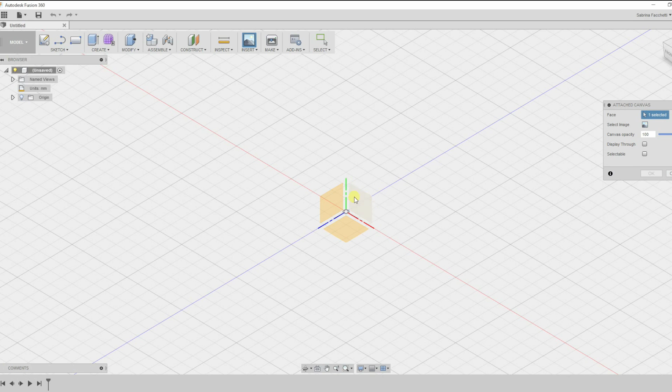Step 1. The first step is to import the image of the sunglasses. We select Insert in the top menu and choose Attach Canvas. We select the front plane because we want to create the frame on this plane, and then we import the image from the folder. We resize the image to make it the correct dimensions.

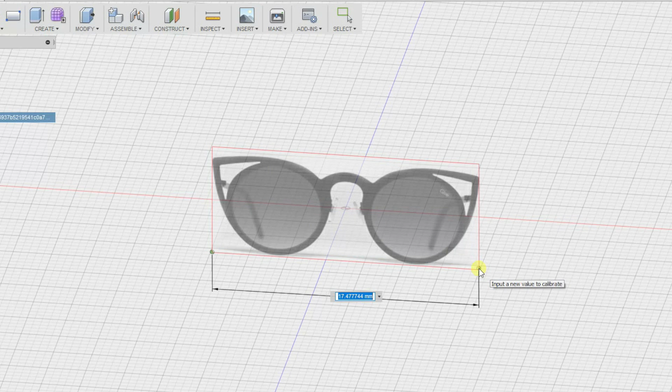To do it, we select Canvases in the left menu. We right-click on the image and select Calibrate. We select the bottom corners and type the new dimension. I know that my sunglasses must be around 135 mm to fit my face.

Step 2. To create the frame, we start a new sketch on the front plane, and using the spline tool, we create the shape of the sunglasses. We start drawing the profile of the right lens. Don't worry if it's not immediately perfect; we can adjust it later using the spline handles.

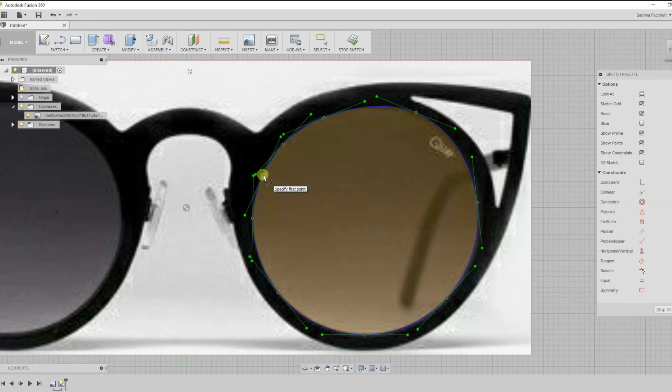Now we select the line tool and create a vertical line on the green vertical axis. We are going to use this line as a mirror line, converting it into a construction line.

I recommend every time there is some kind of symmetry to use the mirror tool. This trick makes your workflow more efficient and precise. So basically, we will draw only half of our sunglasses and mirror the other half.

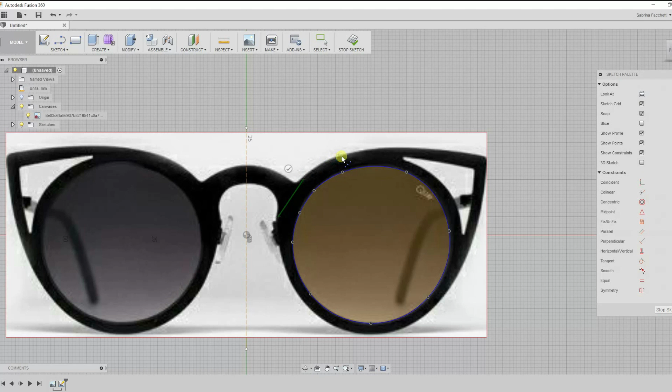Using the spline tool again, we draw the profile of the frame, making sure to draw only the right part and not cross the construction line. We draw the frame first and then we will draw the bridge.

Don't worry if the two sketches are not connected; we will connect them afterwards using the trim tool. In case you need, adjust the spline by moving the anchor points and using the handles.

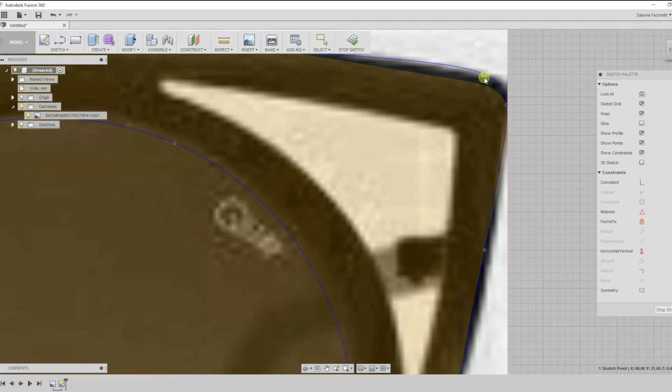Once satisfied, we can draw the bridge starting from the mirror line. Make sure to set the orientation of the points on the mirror line as horizontal/vertical, so the shape will be more organic once mirrored. Using the trim tool now, we cut the lines we don't need and create a unique closed space.

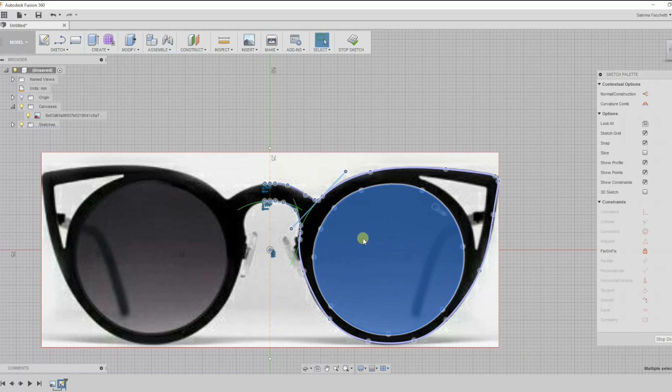We select all our sketches now, and using the mirror tool in the sketch section of the top menu, we mirror them using the construction line as a mirror line. In case you need, use the trim tool again to clean the sketch. Once the sketch is cleaned and you can select the frame in only one click, we are ready to extrude.

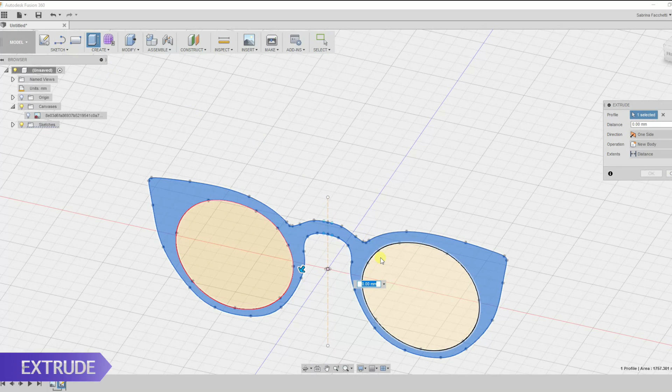We select the extrude tool in the create section and set the thickness at 3 mm, and our sunglasses frame is done.

Step 3. To make the shape less sharp, we use the fillet tool in the modify section of the top menu. We select all the edges we want to make rounded in the front and back, and set the radius of the fillet at 1 mm.

Step 4. To make the temples, we first need to create another plane. We use the offset plane under the construction section of the top menu. We select the side plane from the left menu and set the distance at 62 mm, a good distance to create the first temple.

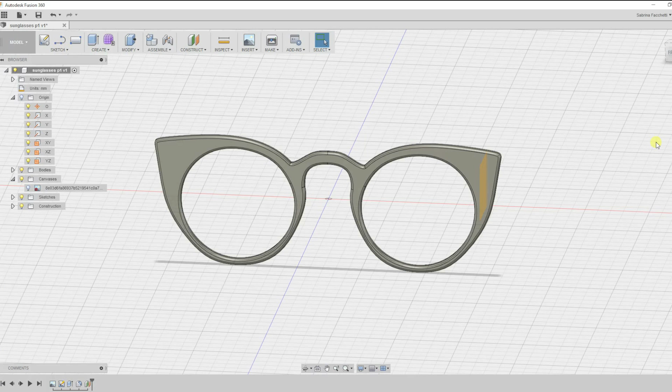We need to create it in a proper position, but still connected to the frame of the sunglasses. On the new plane now, we insert an image to create the temple, the same way we did before: select the plane and select Insert in the top menu.

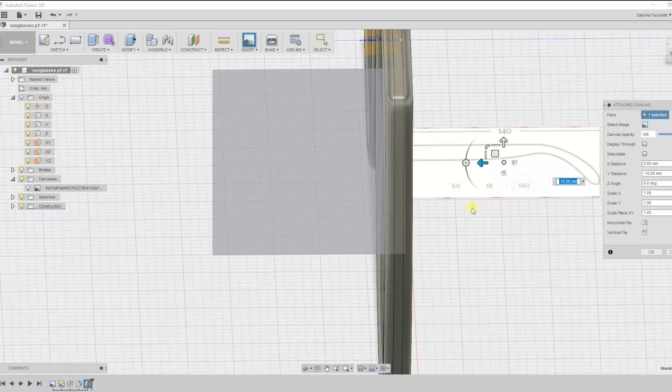We choose Attach Canvas and import the image of the temple. Using the arrows, we move the image to a more appropriate position. Like we did with the frame, we calibrate the image to resize it properly.

I know that a temple of 130-135 mm fits okay for me, so I resize my image to make it 130 mm wide.

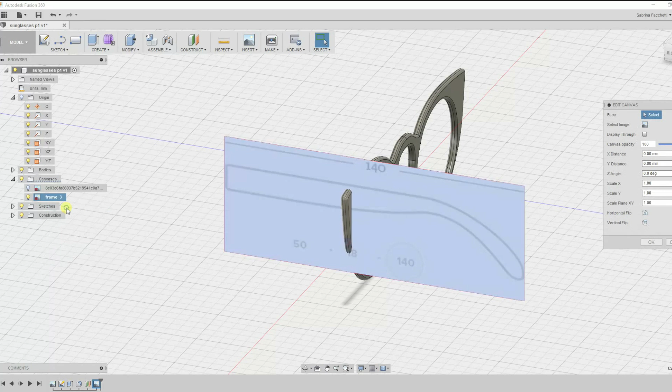In case you need, move the image again to put it back in the correct position. Use Edit Canvas in the left menu to move the image using the arrows or by typing a more precise distance.

We start a new sketch on the new plane, and using the spline tool, we draw the shape of the temple, making sure to join the sketch with the frame to create a single body. We close the profile using the line tool. This step is very important because we need a closed shape to extrude it.

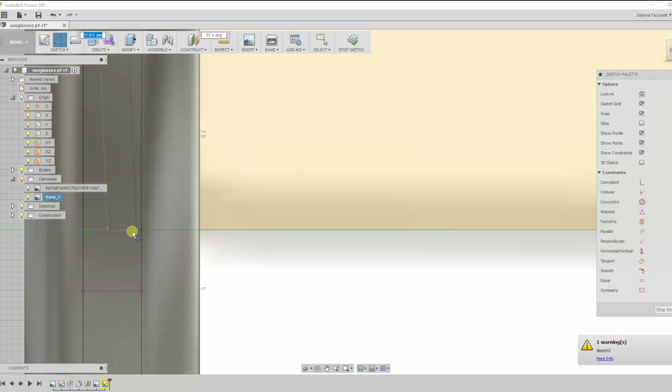I recommend always paying attention to your sketches and checking if they are properly closed. In case you need, you can fix the shape of the temple by moving the anchor points of the spline or using the handles. When you are satisfied with the shape, we can use the extrude tool in the top menu.

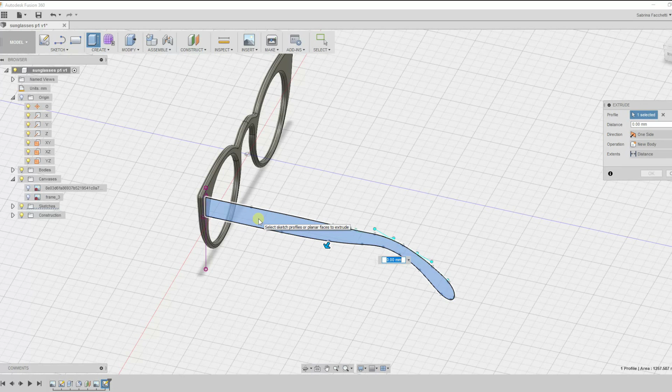We select as profile the sketch of the temple, set the distance to 2 sides, and set 1.5 millimeters on each side, making sure to set the operation to join. And the first temple of our sunglasses is done.

We make the temple's shape less sharp now using the fillet tool in the Modify section of the top menu. We select the edges we want to make rounded and set the radius of the fillet at 1 millimeter.

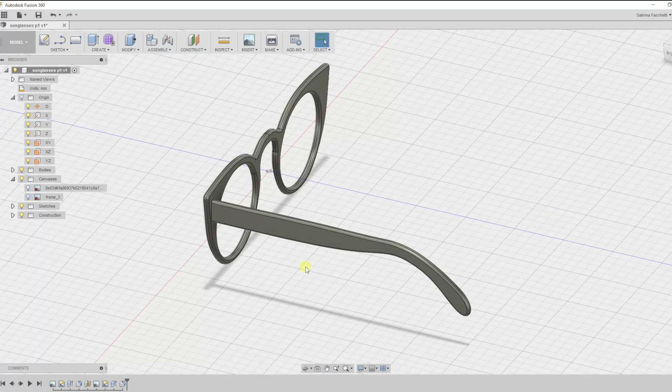Step 5. We create the second temple using the mirror tool. I recommend using this tool every time you have some kind of symmetry, since it makes your work easier and more precise. We select the mirror tool in the Create section of the top menu.

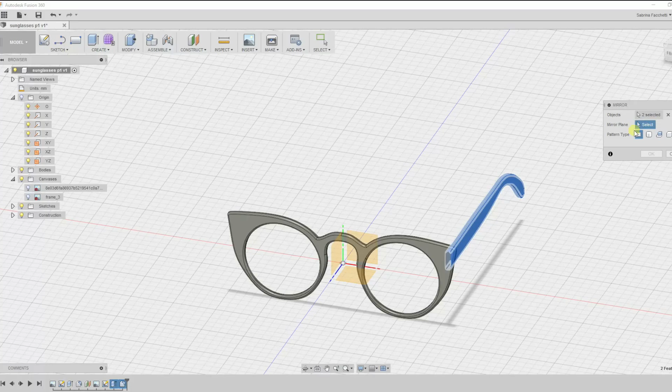As objects, we select the temple. To select it properly, we use the bottom timeline that records the history of every step taken during the process. We select both the temple and the fillet applied to it, and select the side plane as the mirror plane. And here we are, our sunglasses are ready.

Step 6. We save the project in Autodesk Fusion 360 Cloud. Once saved, the new name appears at the top of the left menu. Right-click on it to open the secondary menu and select Save as STL.

In the end, this is the result. So after a lot of hours of work and a lot of prototypes, this is the final product.